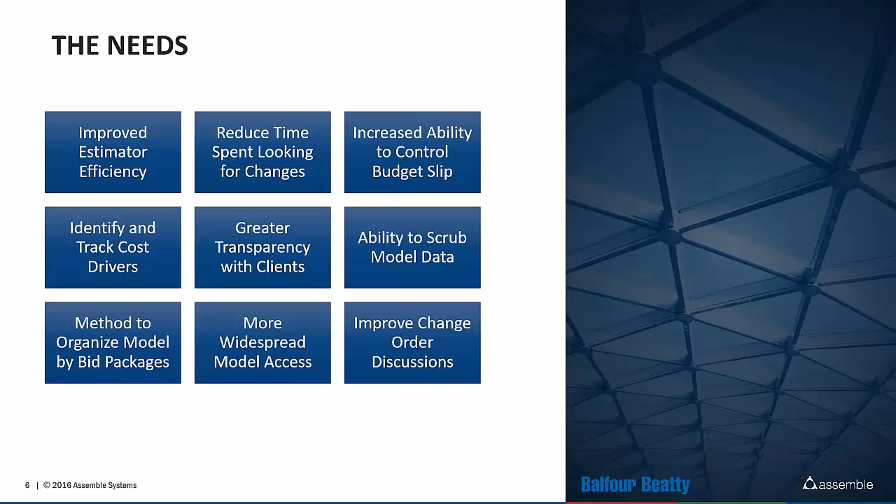One of the things that I brought to Balfour from the consulting days was the ability to sell things, knowing how companies buy things. I think the first thing, if you ever find something that you want to implement at your company, is how are we gonna purchase this, right? You find a perfect solution, you go and you hear these common things. Who's going to pay for it, right? Where's the money going to come from? It's not in our budget.

We hadn't budgeted for this, which in a lot of instances, you can't budget for what you don't know exists, right? You find something middle of the year that you need, but you didn't have in your budget. So do you wait for next year, or do we work through this?

This is one of my favorite: the models are never right. Anytime we talk about leveraging models for estimation, a lot of estimators will just tell you, save it. We're good in our 2D workflow. The models aren't developed enough at the time. We get these early on to get enough information for them.

And in many instances, there have been a lot of, I guess, oversells in the industry as far as what the capability of extraction for quantities are. So I think there's a little resentment in some instances that people just don't trust those numbers.

Next one up, can't BIM 360 Glue do that. I hear this constantly. I think one of the things about that is that not everybody knows what all this stuff does. A lot of times project solution managers, other VDC people, BIM people, we know what these solutions do, but outside of our office, outside of our group, they don't.

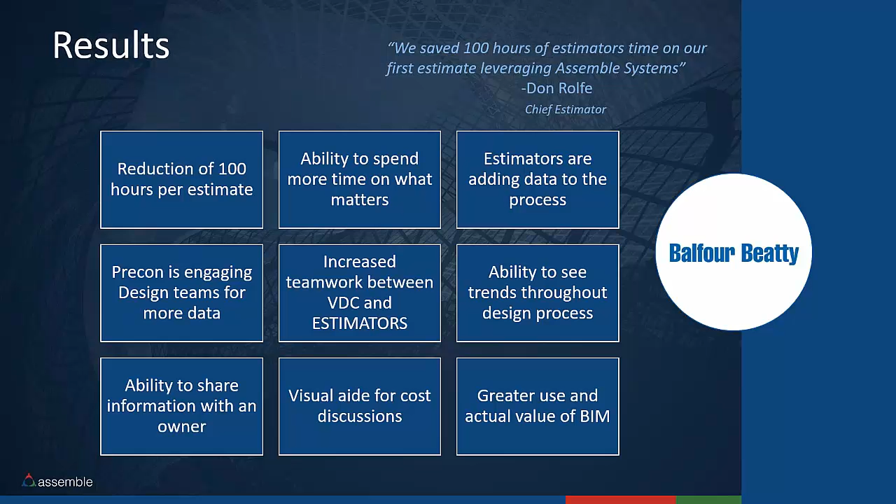And I think one of the things that you told me to do was start slow, train easy, just give them one or two things. So getting into a project, which we'll jump into in a second, that's exactly what I did. I think the first step was just to get them and show them that on the left side of the screen, or actually let's go live and I can kind of walk them through the training that we did if you don't mind.

Absolutely. Okay, great. So for everyone out here, this is going to be a structural foundation model for a project we have in downtown Miami. What you're going to see over here is the 2D sheet that came in with that model. The way I trained my folks is you always have this model tree over here. This is all the different models that we have published. It's just to get over here and see what you want.

I click on structural foundations. I go up to change visibility. I hide others, and then I'm left with just my structural foundations. When I look at an object in here, if I select this, I can come over and I can see all the sheets where that's found, right?

So I'm looking at level 1 foundation plan, and the cool thing about this is, you know, most of our estimators, they're used to 2D, right? They don't necessarily know what this is. And sometimes the good estimators, they get this, they see all this line work. But the nice thing is I can select this and it's selected in my model.

Cool thing about that is then I can click on properties and I can come over here and see what properties there are, right? That's cast in place concrete, it's 7 feet, volume's 2.96 cubic yards. I got my area on it. There's a lot of information. This is typically information that would never be given to them because it just dies in the model.

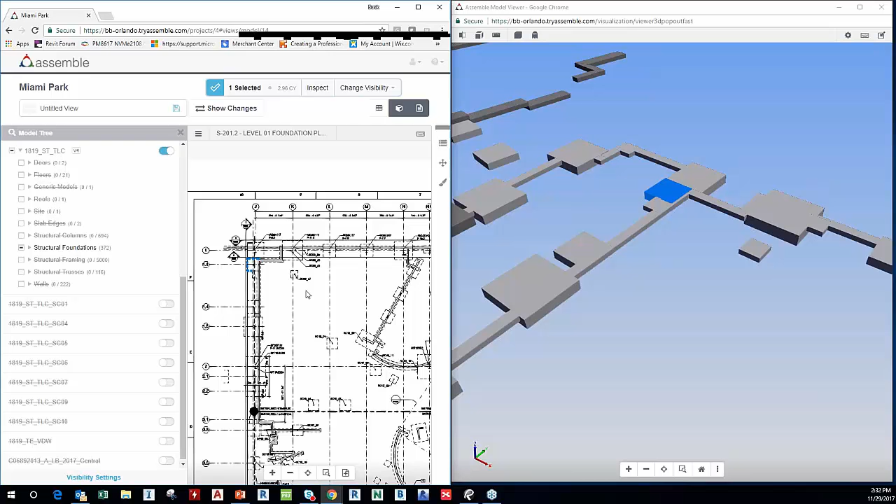One of the other cool things that you'll see, so the model properties actually come from Revit, right? But where we started finding value in this, let me actually close this and get back to this. So if you look at this sheet right here, this is bid package 2, okay? Problem with bid package 2 is it's inside of this overall model. So how do we start tracking that information? Well, the cool thing about that is, and I'm not going to go through each little section, but this is all in bid package 2.

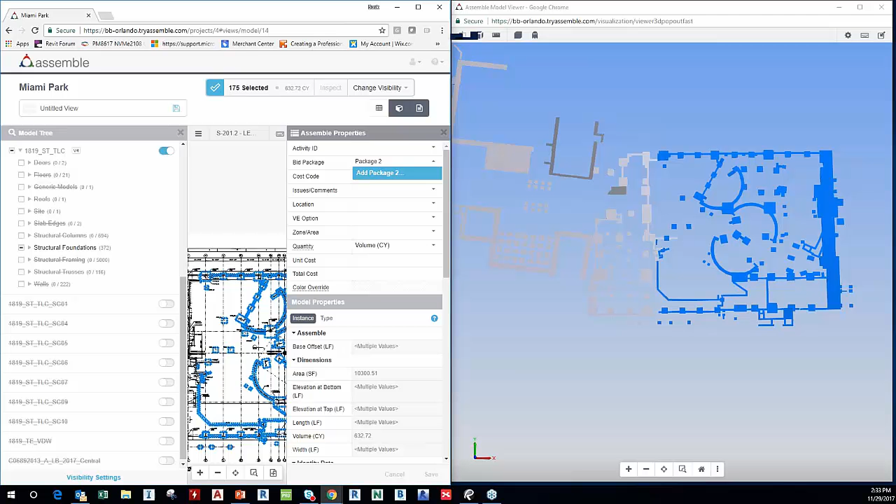I can now select all that, and if you notice, it's all selected in the sheet version. I can come over here to my Assemble properties, and I can type package 2, right? Hit enter. I'm going to add that information and hit save. Okay, it's going to update. Going to close this. I'm going to open up my inventory. Let me make this bigger.

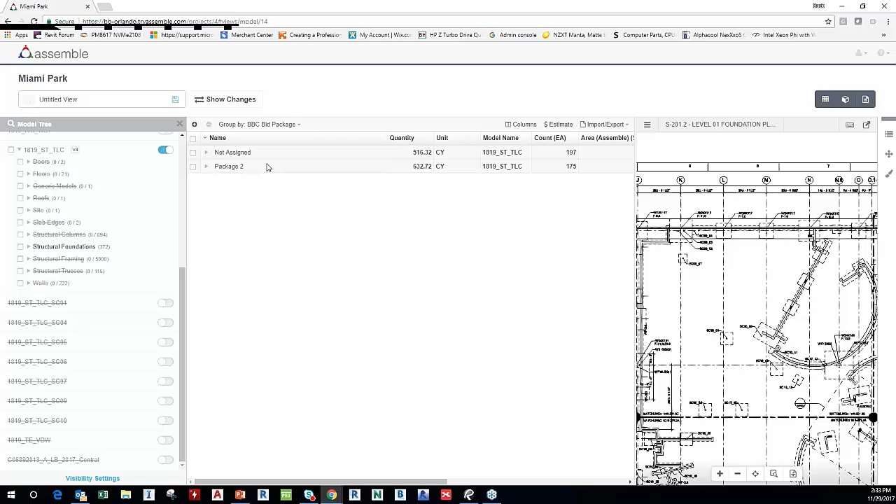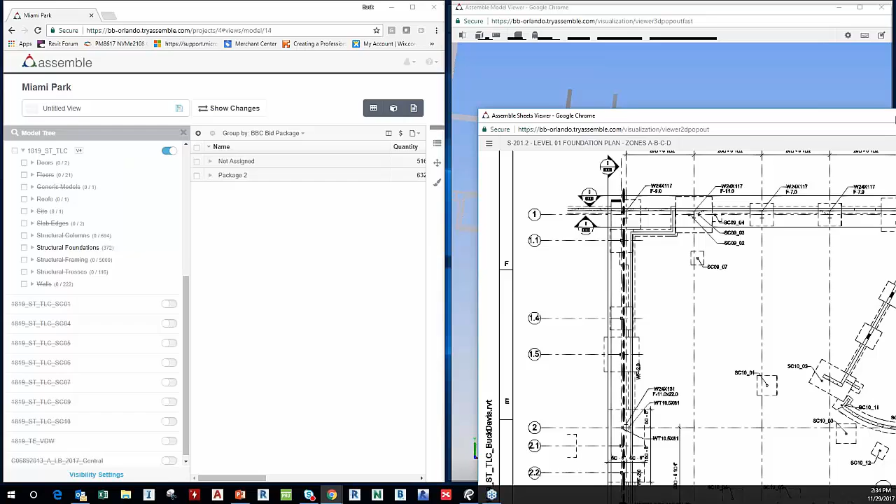As you're reorganizing that, I'm going to jump in and say you guys were actually seeing Buck using split screen. Just for those of you using Assemble, both viewers have the ability to be popped out. And by pop out, you're actually launching another web browser, whatever browser you're using, and it's bringing up another connected tab, essentially. So he can pop that out, and for those of you that have dual monitors on your desk, you can slide that on over and expand your workspace. So just wanted to make sure that people understood how your screen's set up here.

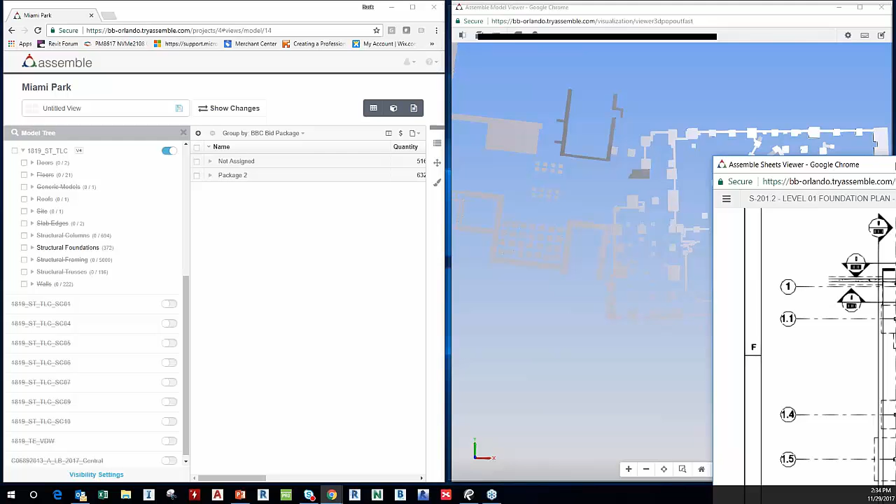Yeah, I'm actually using this on one monitor, but the nice thing about this is in Windows 10, if you slide over to the monitor and you see that little catch right there, now it's split screen on one screen. I can then bring in my model on a different screen and have it to where I'm working on 2 screens, model big, sheet big, estimate over here, which is really nice. I think sometimes screen real estate and how you juggle all this stuff on one monitor is tough.

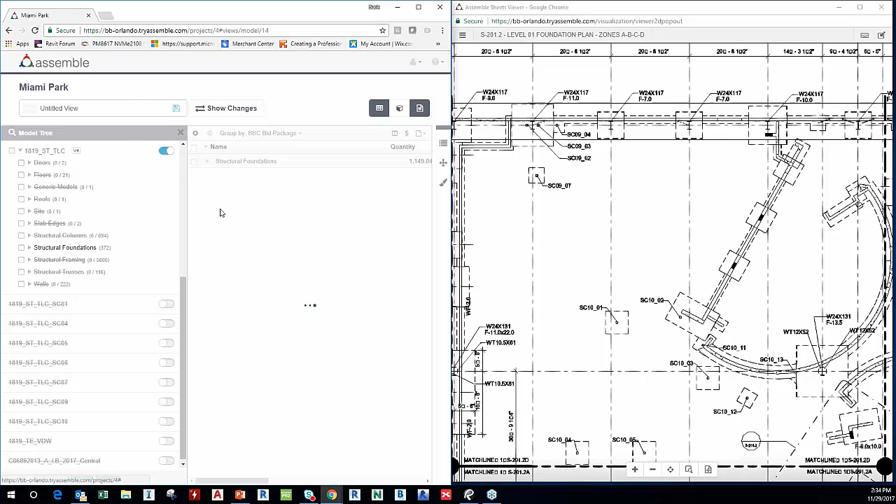When I came over here, I can organize this by my category, which it initially was, which is my foundations. But since I put that metadata tag in, I can now go to this bid package and see bid package 2, which is everything I selected that was in bid package 2. If I want to go back to my model, which is sometimes a nice way to do this, I will jump into this.

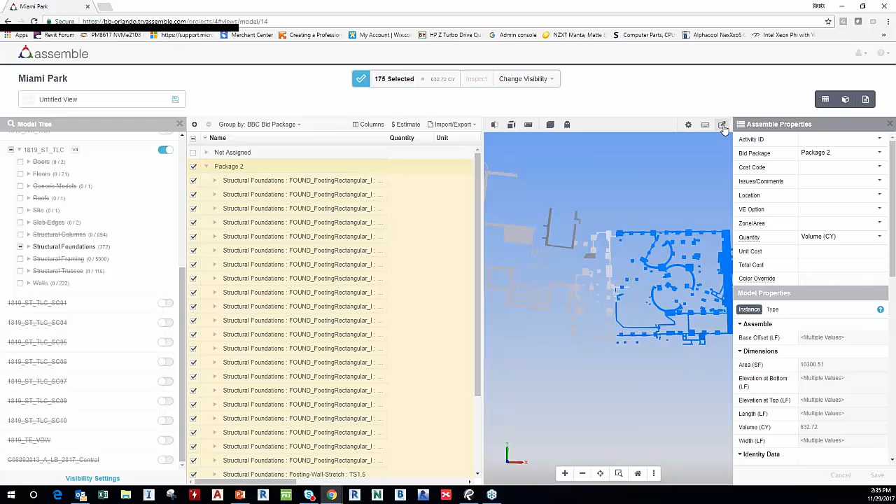Let me get my real estate set up. I'm going to pop this thing out. If you collapse that model tree, you may get a little more space there as well. Now that I've assigned, let's just assume I've assigned everything I want in bid package 2.

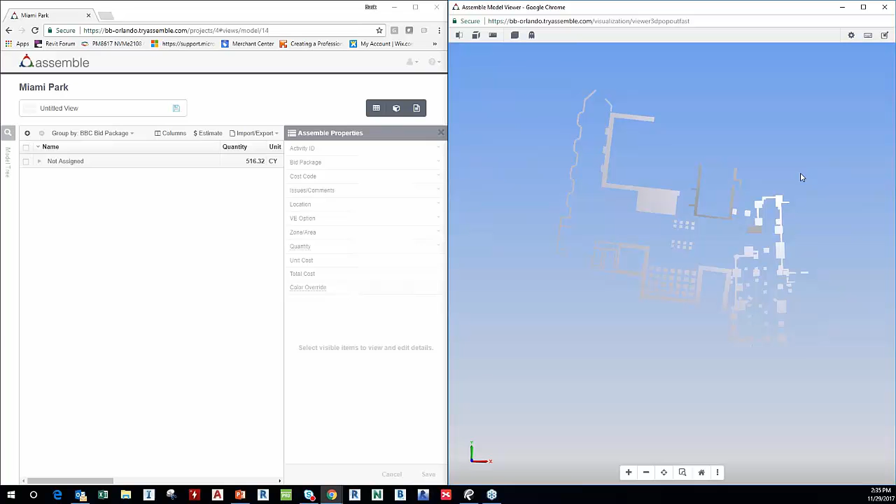I want to move on to the next bid package. Let's just go through and say this. I'm going to hide everything that's bid package 2, and now over here I'm just drilling down again. Maybe this is bid package 3. So I'm going to come over and we'll do package 2, package 3, excuse me. I'm going to save that.

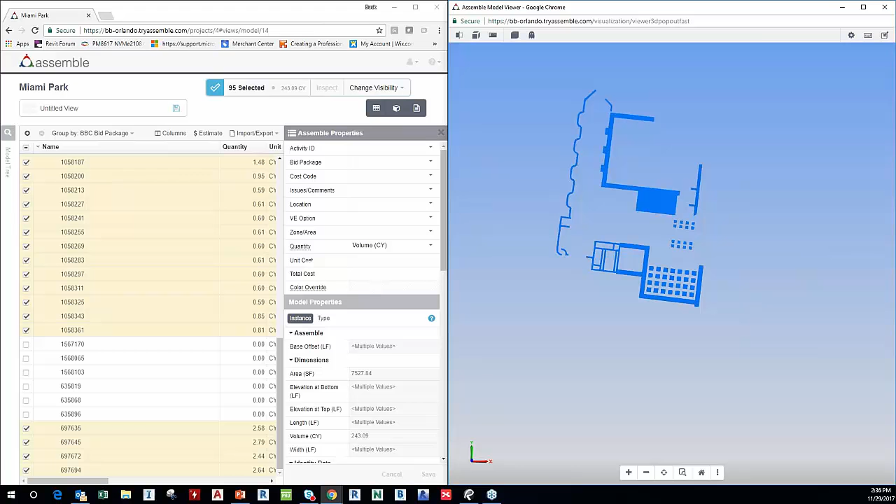Now I'm going to come over to 3, let's just hide that, and then everything else happens to be in bid package 4. So I'm going to quickly toggle down, hit save, and then now I'm going to come back and unhide all, which is pretty kind of cool.

I can come over here to structural foundations, unhide. And now I'm looking at them broken up by packages. So I've got package 2, package 3, package 4.

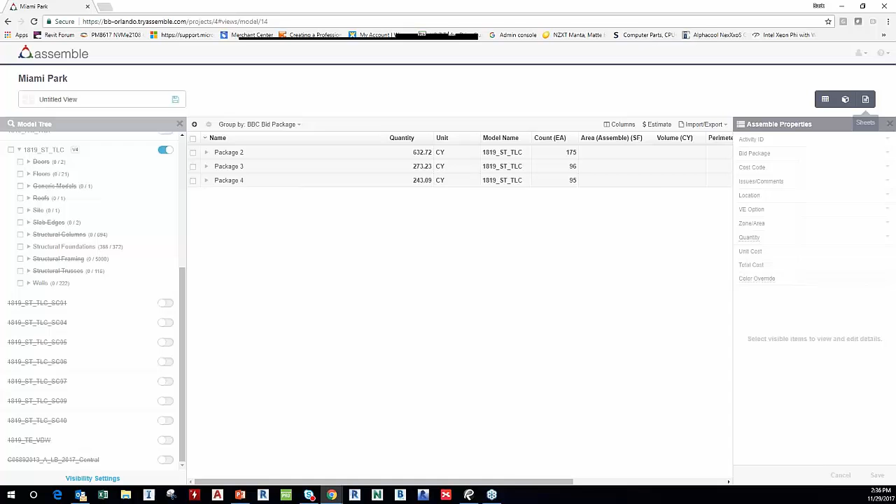The beautiful thing about this is an upfront setup time. I do this one time, and then when I publish the next version—if you notice over here, this is version 4—I can quickly come back and see what happened to bid package 2, what's going on in bid package 3. If I don't see any changes in bid package 4, maybe the designers are still working on bid package 2 and 3, and 4 hasn't quite been touched yet. But it's a great way early on where either a BIM person, a project solutions person, or an estimator can organize the information in the model the way that they want to see it throughout the next 3 or 4 releases, and then track how those things have changed, which is great.

And I know that we all love applications and whatnot. One of the best features that our estimators still love is the export to Excel. I typically don't include the instances, but just to show you the output on this.

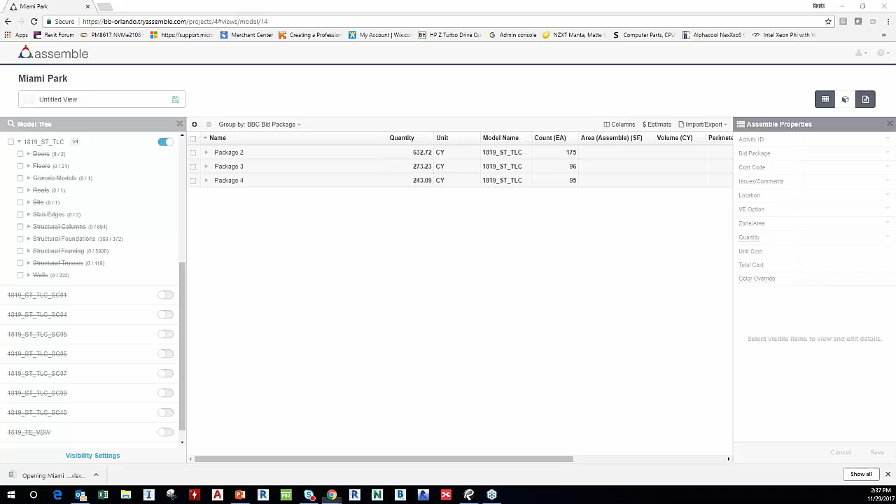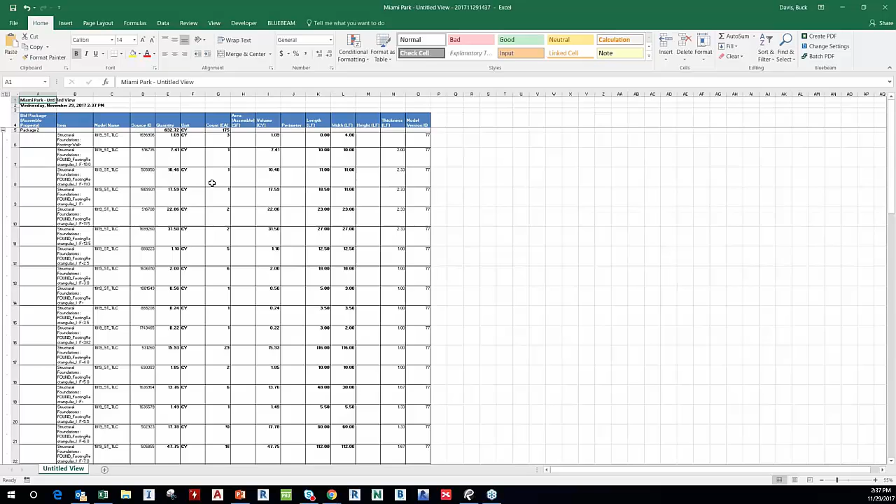As he's pulling up Excel, I'll jump in and say we also have a direct connection to Excel where we have a plugin, and you can use your existing templates and push data into those templates. So there are a couple of methods to get it out into Excel and Power BI and other systems.

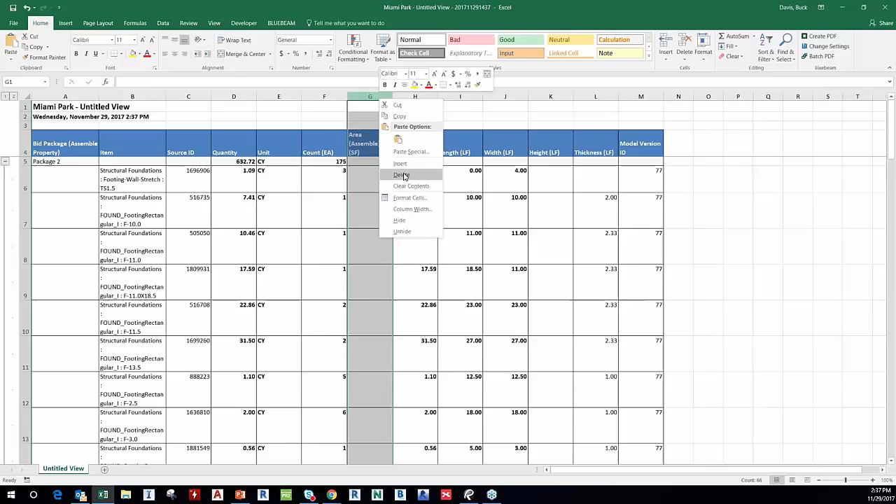The great thing about this is I can come in and clean up my columns if I didn't do that in Assemble, and then I can just shoot this out. If I want to add a column over here that's a calculation, I can do that very quickly. There are all these different solutions for estimation, but Excel seems to still be that 11th hour where we go when we have to get something out to an owner or out to a subcontractor. This is real quick.

So just a quick touch, that's how we're leveraging it. And I would really suggest to anybody out there—not just a shout out to Assemble—this really has been a game changer for my division and my region.

It really has brought operations, estimation, and pre-con together with this one consistent source of truth, easy access, and then being able to pull out information so we can audit where we are on things. Tim, I'll let you wrap it up, man, but this has really been a great experience. So thanks for having me on.

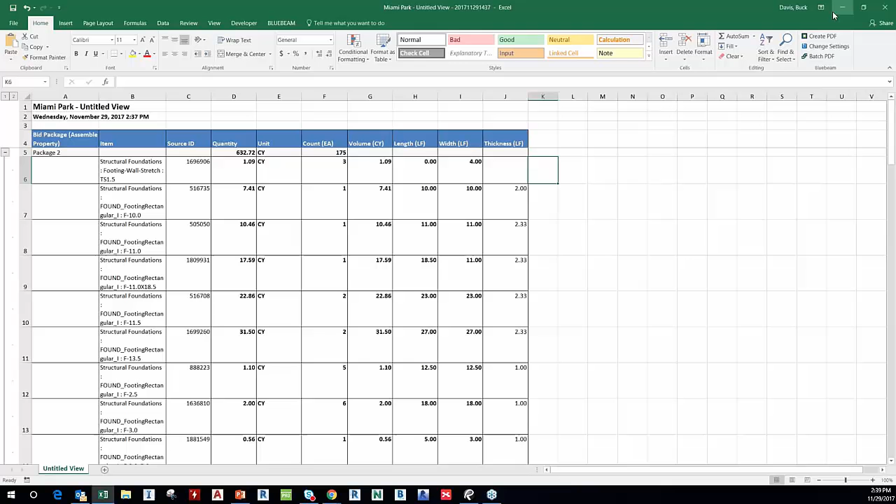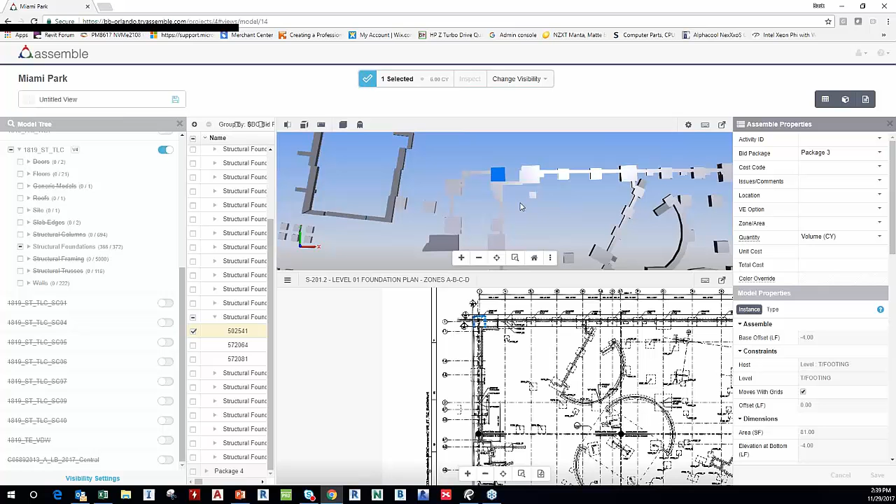Absolutely. And pointing back to that 11th hour approach, one of the challenges Buck mentioned early is that estimators sometimes, or often, don't trust the model data. They say the model's got garbage information, I don't want to trust it. Well, Buck showed that connection between 2D and 3D, and the reason we wanted to incorporate 2D documents with the connected data as a product is so that you can validate that.

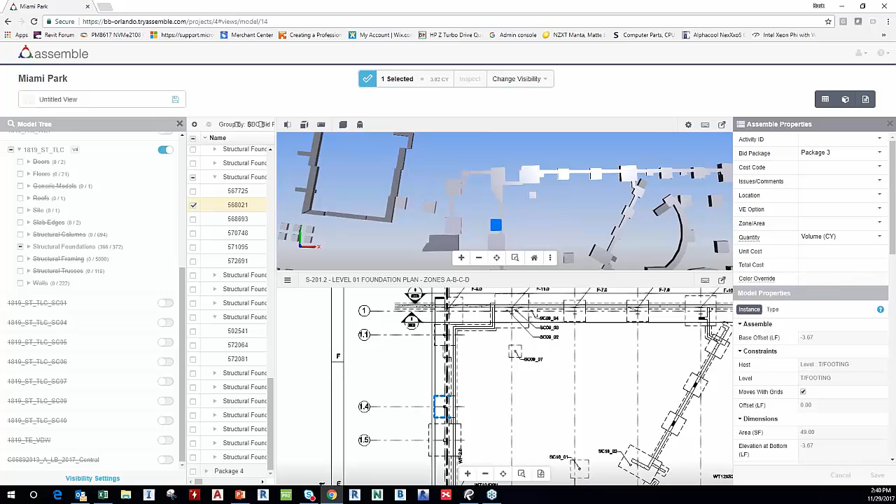You can actually turn off your 3D viewer altogether, make those selections as he was doing in the 2D, or by your groups in your inventory, and then compare that directly to what you've done in your takeoff. It makes it really easy to do spot checks and validation against that number. Maybe you're off by 5% or 10%, and you can pretty quickly dial in and understand where things might have been missed in the estimate or how things need to be changed or conditioned in the model.

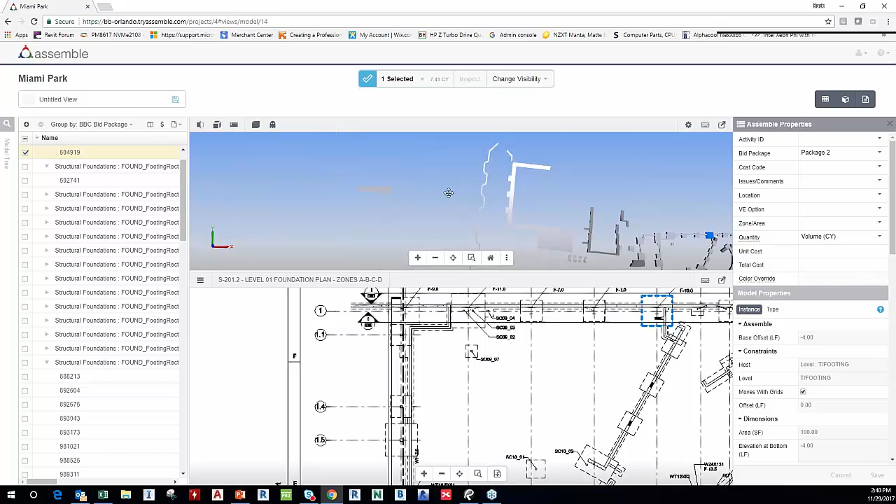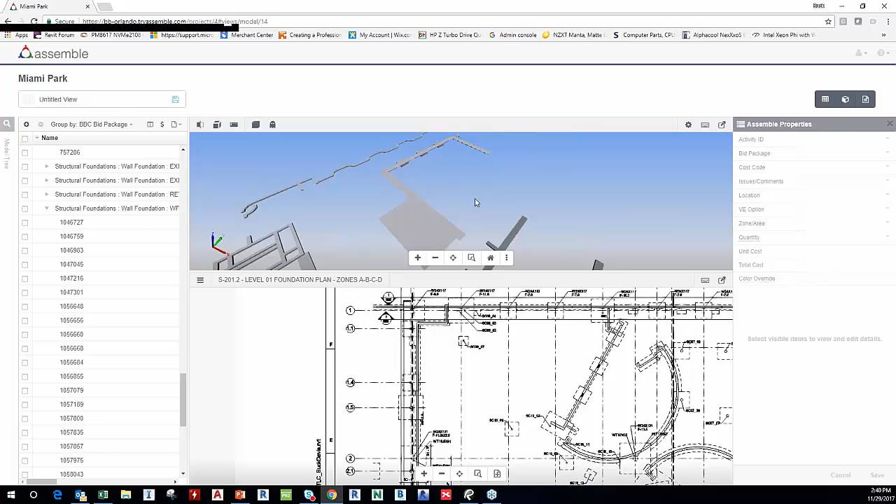And it really allows the team to collaborate and communicate with one another quickly. So having that visual representation - I say this often, a picture paints 1,000 words, but a model paints 1,000 pictures. It's a saying we hear often in the industry now in the VDC space, but it's true. It gets people to the same level playing field very quickly, so you have that ability to consume and understand the data more readily.

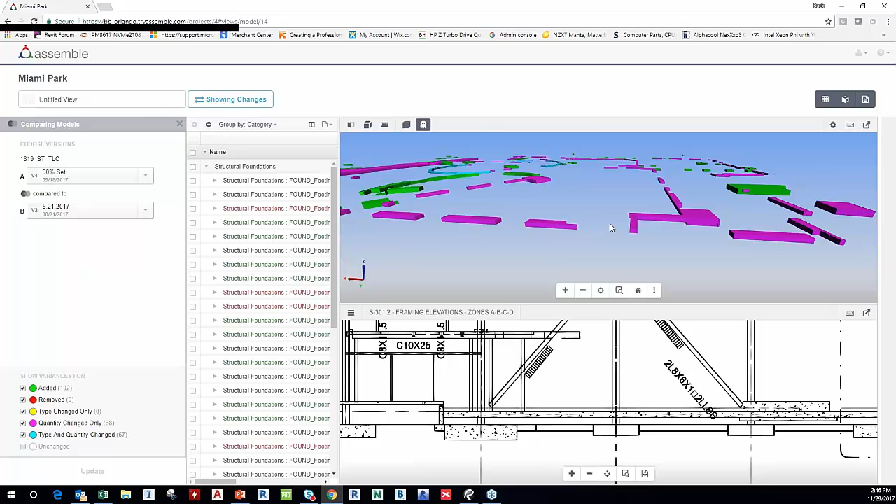What Buck is doing right now is actually using a show changes feature where we can show what's been added, removed, type name changed, or quantity changed. You can very quickly see visually and in the index or inventory exactly what changed and how much impact that is in both quantity and cost if you've added that.

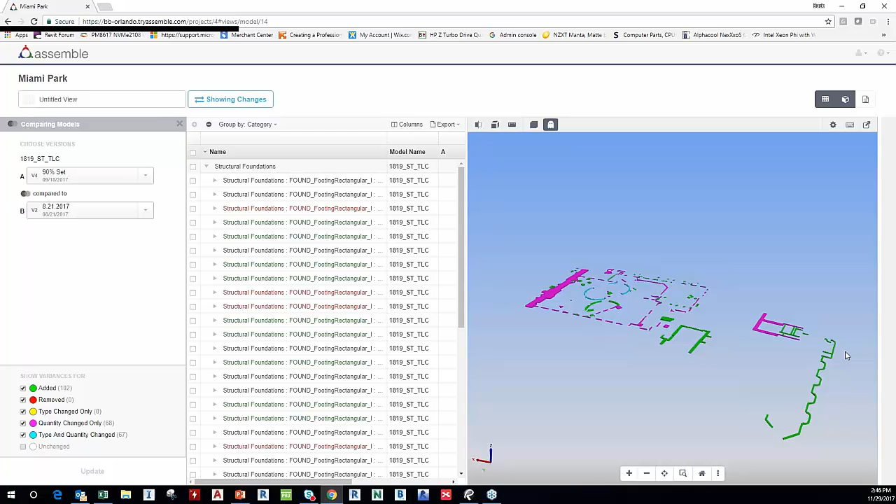So this is huge, just to be able to look and see before we even investigate anything, to say look, all this has been added. The quantity changed, which means they were probably working up on doing a little bit more detail work on those foundations. I don't see a whole lot of type and quantity changed over here.

We've had instances, and Tim, this is I think one of the places where our management in pre-con loves it, where you open it up and everything is green and red, meaning when we're paid to go out and do an estimate - we do a 50%, we do whatever, we're contractually bound - all of a sudden we see that 90% come out and everything has been removed, everything has been added. It's a new estimate. I can run down the hall and say, don't look for the changes, this is a brand new estimate. Go back through and hear the new numbers. But we can also get more billables from those clients because literally they've just sent us a whole new set.

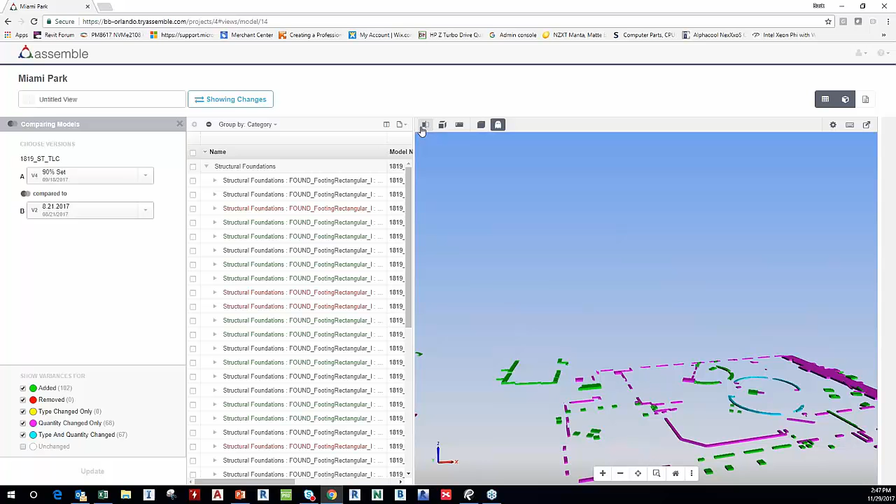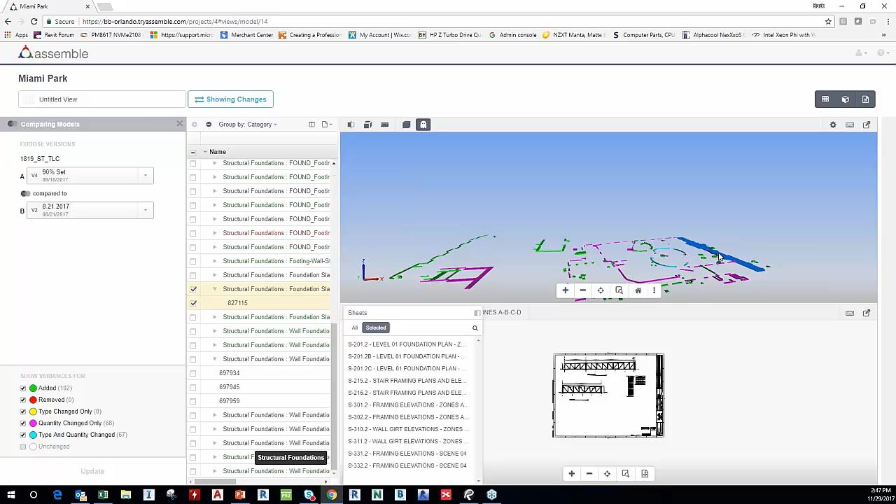The great thing is, across however many sheets you've got in this particular project, you're looking at pretty wide scale changes in these two cases, and being able to quickly identify for each of those packages where you might expect to see changes. Okay, let's look in quadrant A because that's where a vast majority of this change is, and in quadrant C it doesn't look like they've done much of anything at all. So make sure we're focusing on A, and it really helps the team align with that initial check and review. It's so easy to see and understand what and where has changed.